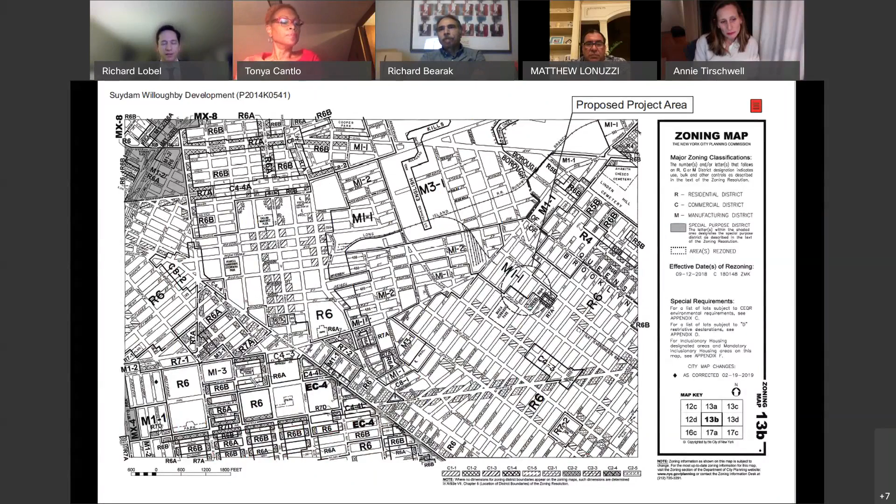So you'll notice that the project area is included within the circled area, and the subject block is currently located in an M1-1 zoning district. There's currently also an R6 zoning district to the south of the property on the southern portion of the block, which currently houses a school that will be affected by the proposed rezoning as well. Next slide.

So there are 4 basic actions sought pursuant to the subject application. The first is a text amendment application, and the reason for that is because we're creating a new special mixed-use district.

This is an MX-21 district. You can see it on the Willoughby side of the property, which pairs an M1-5 district with an R7D district. This density and height is appropriate for the area, particularly in light of the existing R6, which exists on the southern portion of this block, as well as along many blocks to the south.

In addition to the text amendment, which creates the MX-21 district, there's a zoning map amendment which accomplishes 3 things. First is to map that MX-21 district from the mid-block west through the project site to the Willoughby side. Second is to take the existing M1-1 and rezone it as M1-5, which you'll see on the Suydam side of the property to the eastern portion, where there's currently an existing 3- and 4-story manufacturing building.

In addition, there's an amendment to the southern portion of the block. You may see that the existing R6 is extended 25 feet. That's merely to correct a split lot condition, so it's more of a corrective action than anything.

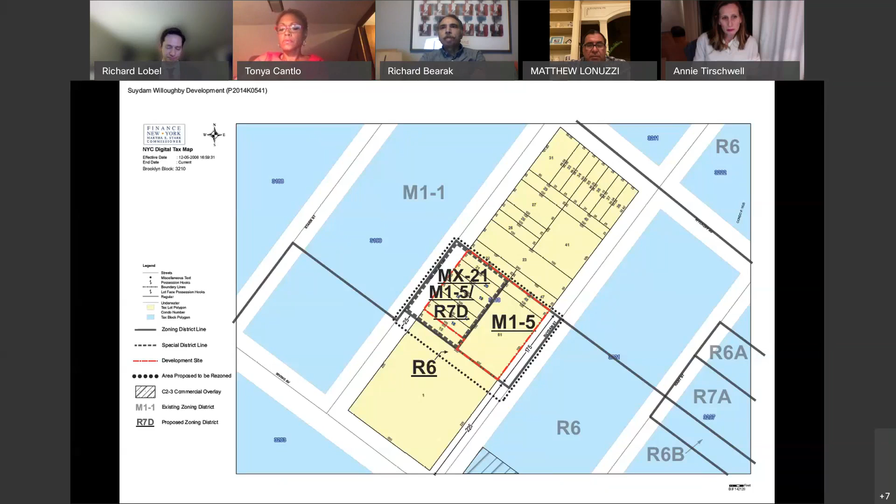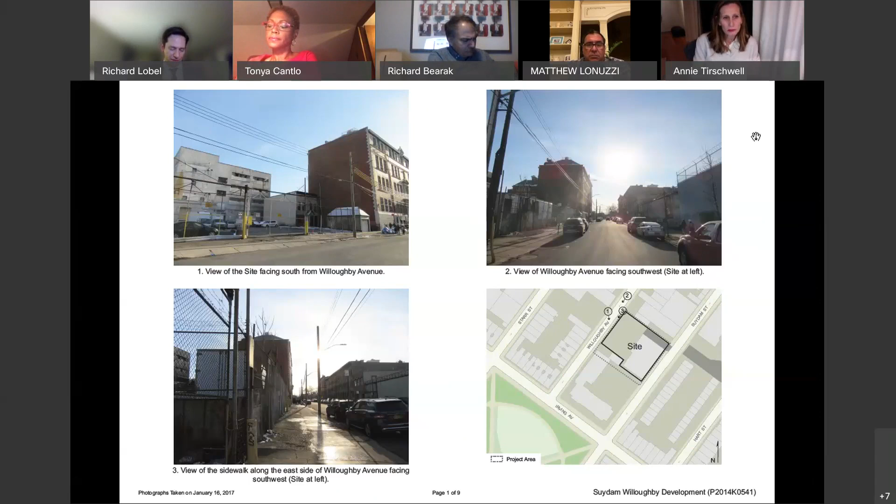It's an area which, after our discussions with the community and others, really seemed to merit this application and showed a real need for the additional development that will be created through it. David, if you want to page through the next 2 slides, there are additional photos of the buildings in the area, and then you'll come to the area map.

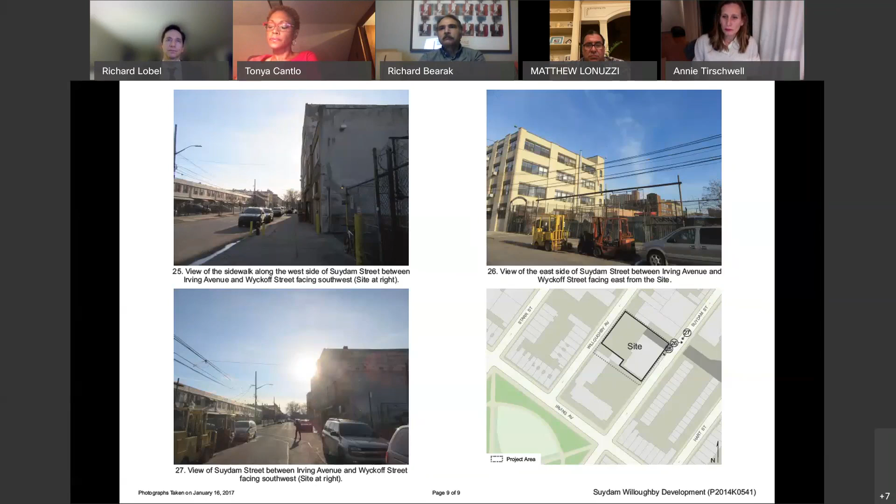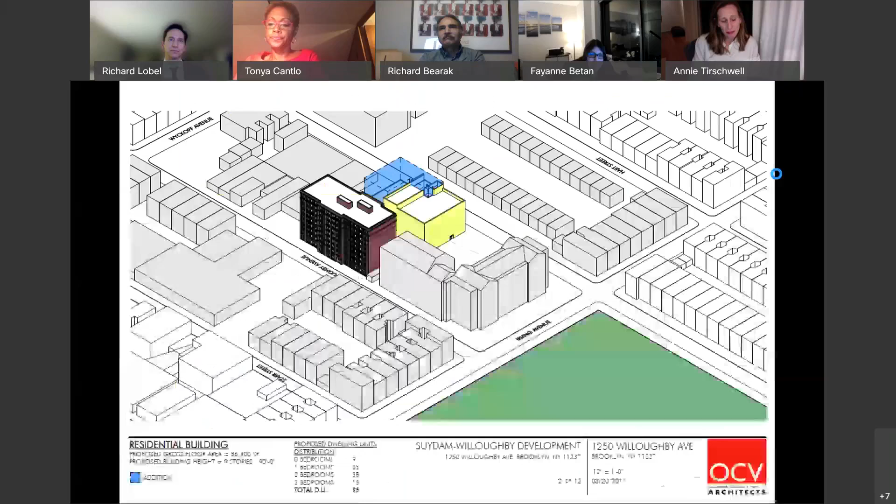One more slide. We lost David. Ah, oh, that looks like an actual photo. Did I lose the area map? No, I think it's a couple slides back. Again? No, back, back, not forward. Oh, you might have pressed it. Almost there, one more. It's almost there, it's lagging a little for me.

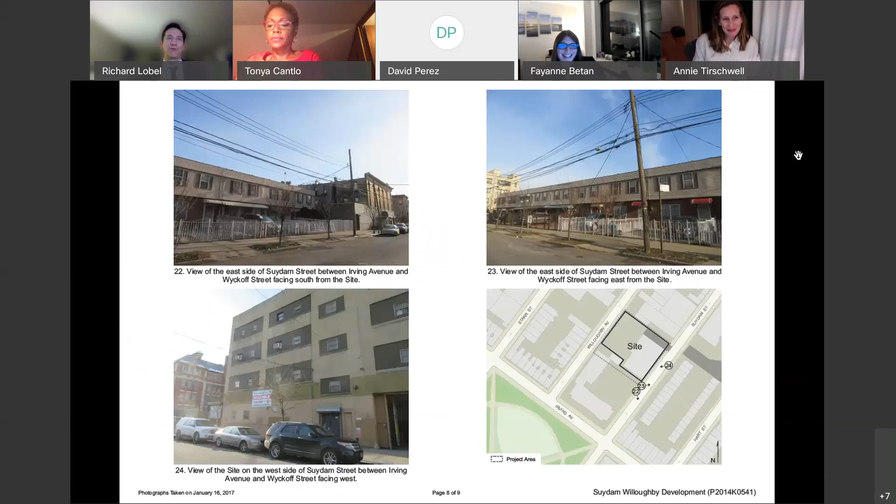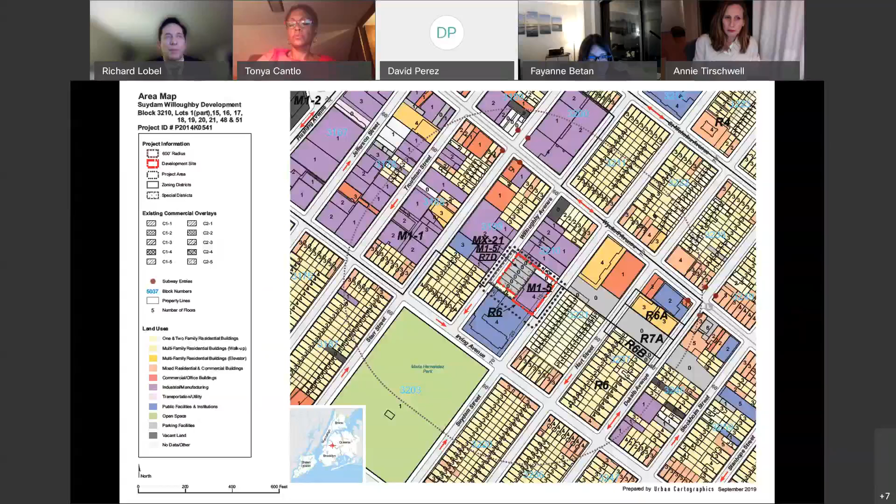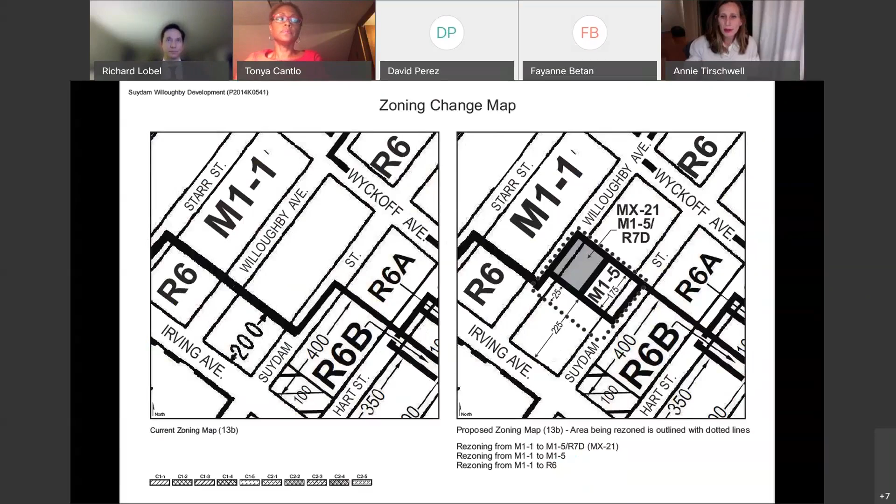So as discussed, this project is really a mix between affordable living and affordable working spaces. The manufacturing portion is an extension of an existing manufacturing building that's a little over 42,000 square feet. We intend to build a little over 14,000 square feet onto the existing structure, for a proposed building floor area of 56,580 square feet after the improvement.

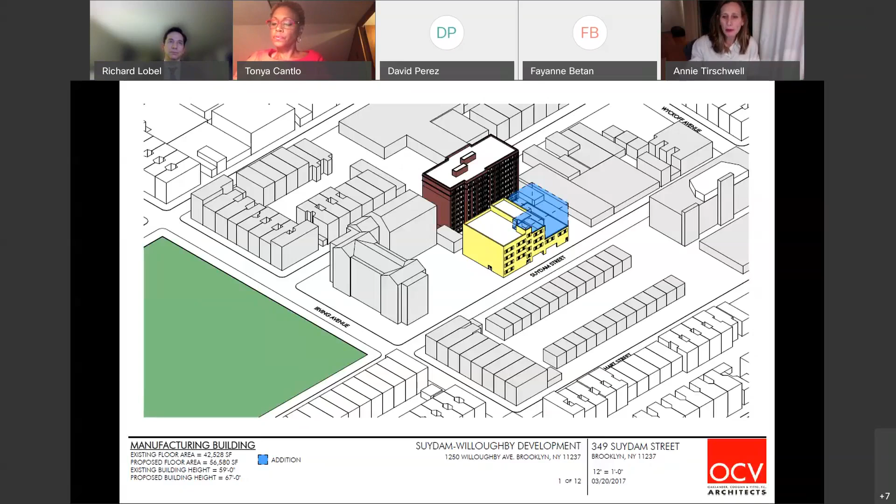As Rich was remarking, the density for the manufacturing building is really built off of the existing manufacturing building and is quite contextual. I'm going to talk a little bit about the manufacturing building in the slides coming up. Let's switch to the next slide, please.

The residential portion of the building is meant to house approximately 95 units of affordable housing. We intend for this project to fall under the mixed income program with HDC, the M squared mixed middle program. We've already been in conversations with them over the last number of years, including most recently as term sheets have begun to change. This building is approximately 95 units, with a mix of unit sizes, which I'll walk you through on an upcoming slide.

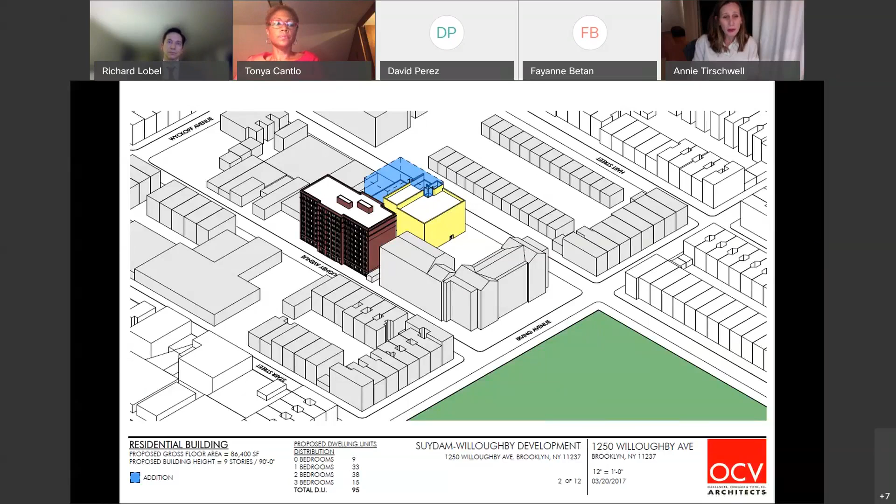So the existing building is a 43,000 square foot industrial building, currently tenanted with manufacturing tenants. We'll talk a little about that as we move forward. It's important to note the development team, Matt and Getz, have owned this building for the last 20 years, and it has solidly been tenanted by light manufacturing tenants.

In fact, part of our community engagement process included walkthroughs with the Department of City Planning, where folks were able to see firsthand the types of manufacturing tenants currently in the building, as an indication of what has been there in the past and what we intend to develop the new square footage for.

As you guys probably know, this is a very well situated building close to public transportation and adjacent to an in-place community of workers. We intend for the additional manufacturing space to be tenanted very much in keeping with the tenants we have now, so small to mid-sized production spaces. Next slide, please.

It's important to note, as city planning and the community were also interested to learn and relearn, the building has been populated by light manufacturing tenants for as long as Matt and Getz have owned it. We've decided to highlight two particular tenants: Nala Inc., a furniture design company that has been a tenant for 14 years, and Molina Carpentry, who's been a tenant for over 6 years.

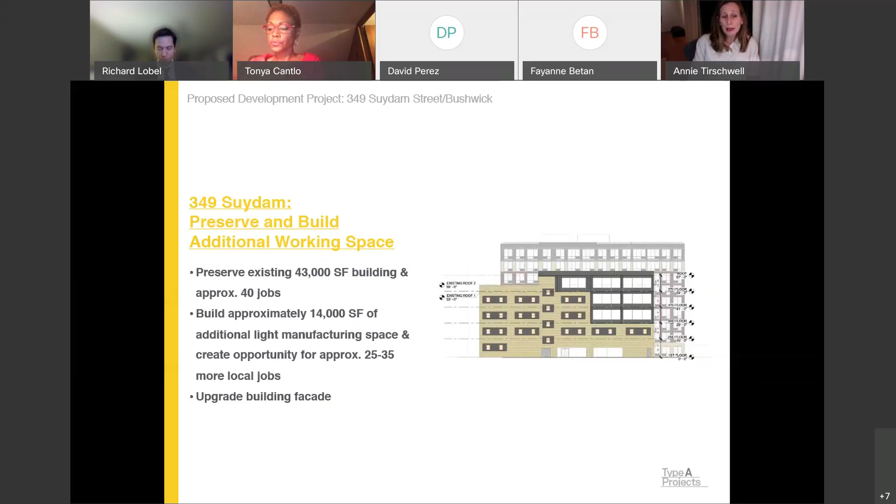So again, with this expansion, we intend to build onto the existing manufacturing building approximately 14,000 square feet. Given the density of the workforce in the building already, we think that will lead to about 25 to 35 new local jobs. As part of the addition, we will also do upgrades to the building's facade. As folks have walked through the building, certainly in Bushwick, it very much feels like a manufacturing building, and it's tenanted as such, so the upgrades we're making are in line with that manufacturing tenancy. Next slide, please.

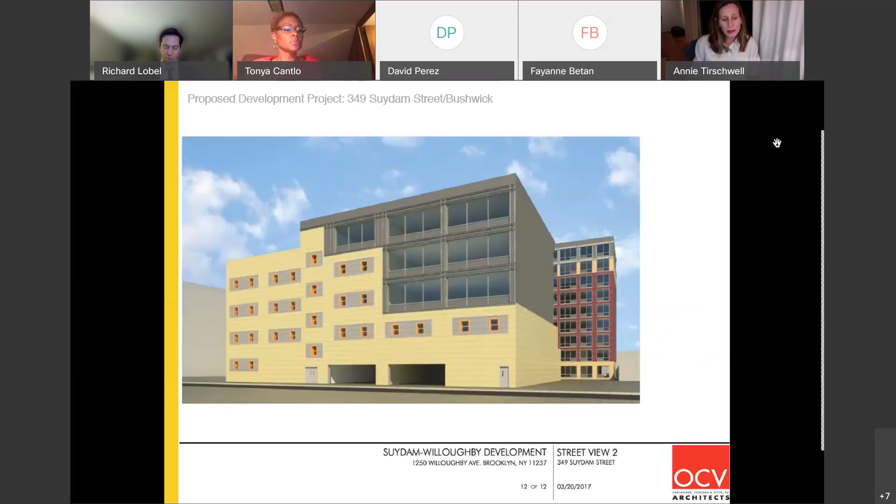That's just a quick rendering of the additional manufacturing space, woven into the fabric of the existing manufacturing building. This image is the new residential building, again a 100% affordable building to be built in line with the mixed income M squared program. Next slide, please.

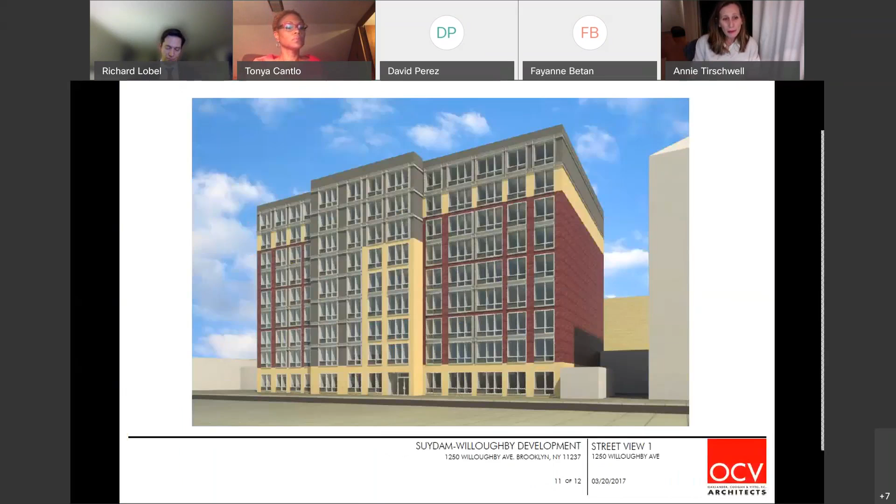We look at this project as really part and parcel of each other, that the manufacturing space and the residential space is one large development. And the way that we were able to afford to build more manufacturing space was by looking at this project as one large mixed use project. So the mixed income affordable housing underwriting is really what allowed us to build such a complicated and mixed-use project. Next slide, please.

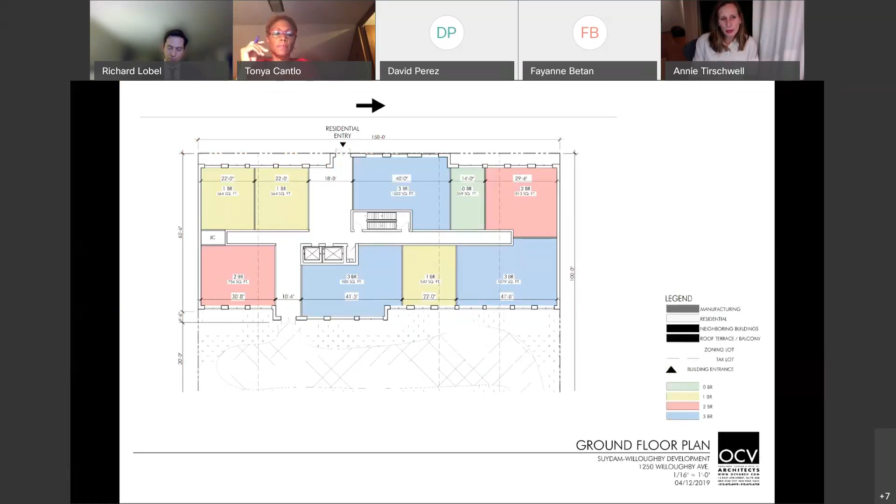Again, just another sample floor. And the next slide, another sample floor. So again, just intended to make sure that there is a robust mix of unit sizes distributed evenly throughout the building. And you'll see that there is indeed a rear yard to the project, which we intend to build for the benefit of the tenancies.

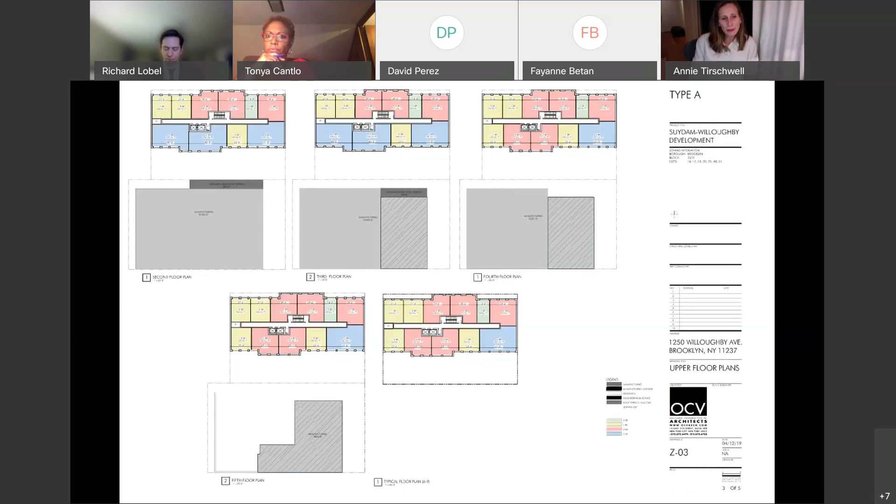And that is our presentation, but certainly happy to answer any questions.

Thank you, Richard, for your presentation. So actually, we have several questions for you. The first question deals with the conditional approval by Community Board 4 in terms of providing more units at 30 and 40% AMI and to seek HPD funding. So if you could talk about the steps that you've taken to comply with the conditional approval of CB4.

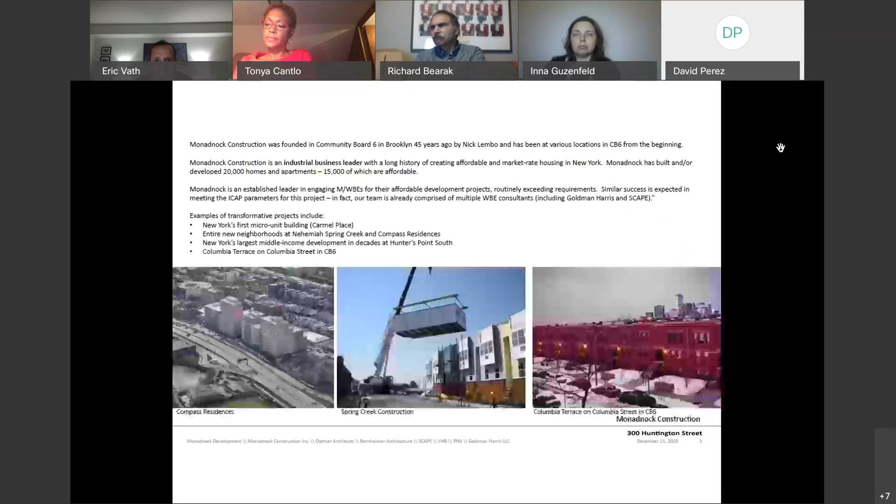Now a little background. This application is brought by the owner, Monadnock Construction. Monadnock was founded, and it has been in Brooklyn for over 45 years. I believe some of you may know Nick Lembo, who's been a fixture in this neighborhood, including CB6. Monadnock Construction is your classic maker—a construction company that builds buildings, and they've been doing so successfully for decades. They're proud to say they've developed over 15,000 units of affordable housing, and this construction has continued through the COVID-19 pandemic.

Some examples of projects you may have heard of: Carmel Place, New York City's first micro-unit building. They've built entire new neighborhoods, done Nehemiah Spring Creek and Compass Residences, middle income development at Hunters Point South, also Columbia Terrace on Columbia Street in CB6. So you see Monadnock is an important and vital piece of Brooklyn's heritage here. Next slide, please.

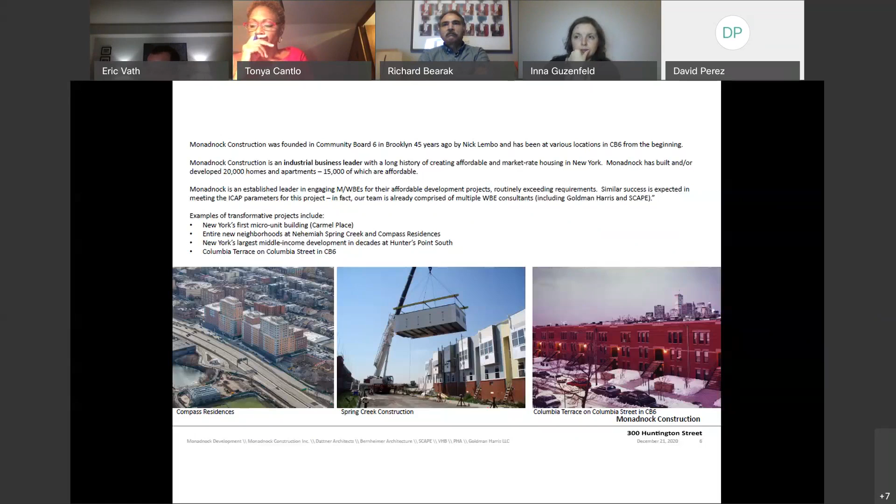Monadnock has a couple of needs. They have a current headquarters on 3rd Street that they're looking to keep within the neighborhood. They employ about 250 people out of their 3rd Street location—80 people are at the headquarters itself, but they employ 250 out of those offices. What they want to do is expand, so they've identified a site along the Gowanus for a proposed 6-story, 100,000 square foot building.

They're going to occupy a portion of the new building as headquarters—not only will it have their shop and a yard, but also their offices. There will be space in the building for light manufacturing uses and a cross-section of other uses. As we'll see in the renderings, they'll have ground floor retail, including restaurant spaces, that really activate the Gowanus Canal and make it a vital and exciting new waterfront. This is in keeping with the Gowanus rezoning, which we'll discuss shortly. Next slide, please.

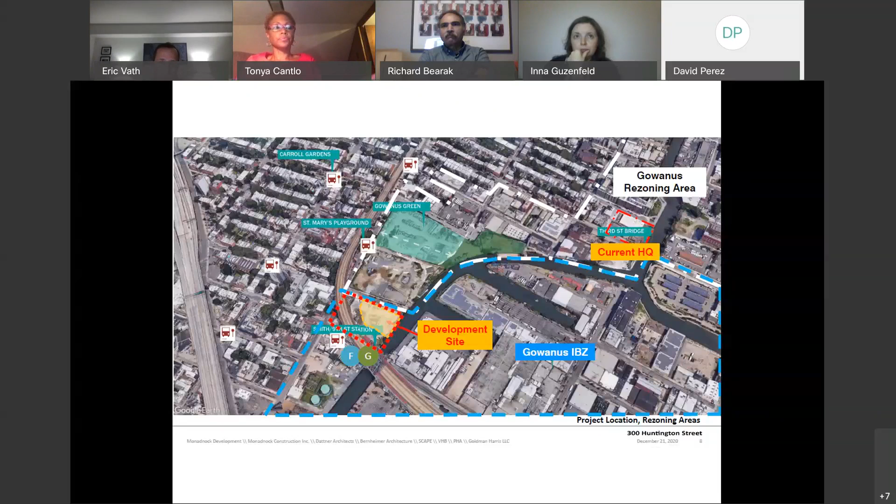So here's a good overview. You can see at the upper right, Monadnock's existing headquarters, so they're not moving too far. But I want to draw your attention to a couple of things. There's the white dash dotted line, which represents the Gowanus rezoning area. This site is immediately adjacent to and outside of the Gowanus rezoning area, and it's in an IBZ, whereas the rest of the Gowanus rezoning is not. The blue dash line indicates the IBZ. And you can also see the development site shown in yellow, which is a portion of the rezoned area, shown in a dotted red line.

So this area is what we like to consider transit rich. In addition to being located directly beneath a subway line, the GF line, there are also plenty of bus lines in the vicinity, as well as bike routes and pedestrian opportunities. Once the Gowanus plan comes into effect, the entire waterfront will be activated for pedestrian use. And this Monadnock site, though not part of the Gowanus plan, will serve as the gateway to this vital and exciting esplanade as it runs through a newly cleaned up and dredged Gowanus Canal.

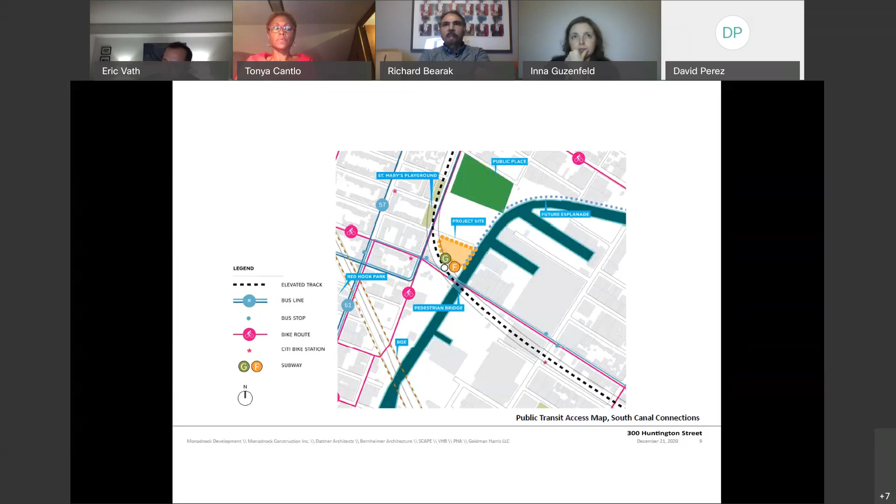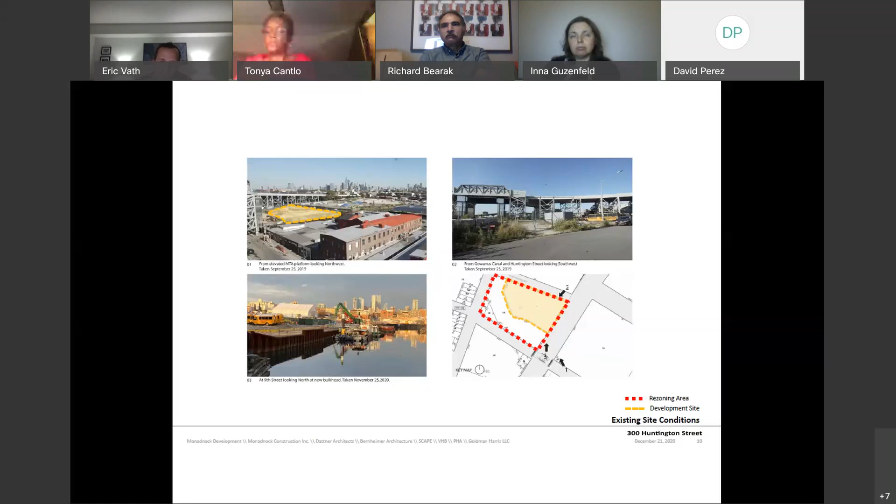So here are some site photos for context. On the upper left-hand corner, you can see in yellow, that's the site. It's actually currently used for bus storage - you can see some of the buses in some of those photos. On the bottom lower left-hand corner, you'll see they just replaced the bulkhead. It's a sheet pile bulkhead that's newly refurbished, and work continues on the bulkhead at the end of Huntington Street. Monadnock Construction has proactively replaced the bulkhead along their site. Again, the dashed red line is the rezoning area, and the yellow is the development site where the 100,000 square foot building headquarters is proposed.

So let's talk about the zoning. The zoning is currently an M2-1 medium manufacturing/industrial district. It has an FAR of 2, maximum building height is 110 feet. The parking is based on a rather onerous requirement of square footage for the use or the number of employees, whichever is lesser. Due to these parking requirements, it pretty much makes the development site impossible to develop, because in an as-of-right scenario with 100,000 square feet of floor area, there would be approximately 242 spaces required for a project of this size. No below-grade parking is feasible here because of the high water table. Above-ground parking, of course, would in the exterior take up the construction yard, which is vital to Monadnock's business. And if it's put inside the building, it would raise the building too high along the Gowanus Canal and put it up against the height restriction.

So the proposed zoning - we propose to make a very moderate change from an M2-1 to an M2-3. An M2-3 district actually has all the same bulk controls. The only effect it's going to have here is to eliminate parking requirements. The FAR of the existing M2-1 zoning is 2, maximum height 110 feet, and there's the onerous parking requirement. The proposed M2-3 has an FAR of 2, the same FAR, same height restriction, and no parking requirements. Historically these M2-3 districts were zoned along waterfronts, traditionally in Manhattan, so it's actually a very suitable zoning district for not only this area, but also for an IBZ.

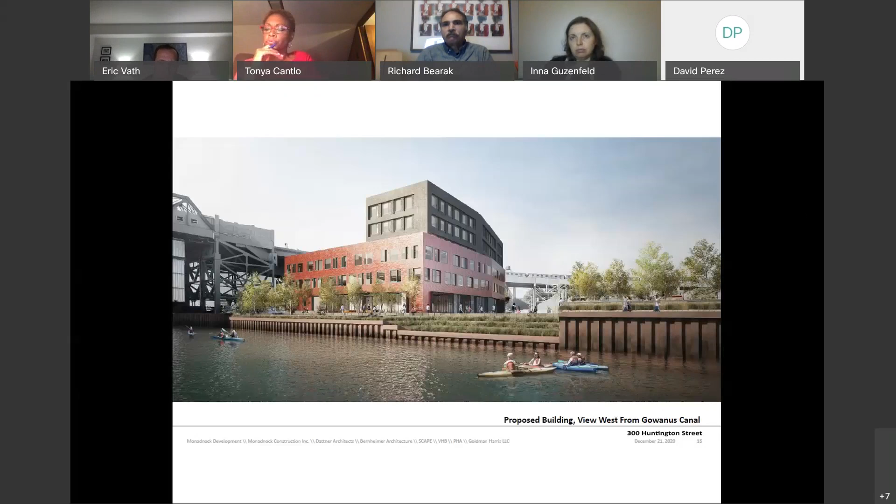So here's again the rendering showing the proposed building, and you'll see that this does show the sheet pile bulkhead newly installed.

Now I'd like to introduce, if he's available to speak, the architect Bill Stein. He's with Datner Architects, and he can take you through his design of the building. Bill, are you there? I am. Thank you, Eric. My name is Bill Stein. I'm an architect with Datner Architects. We are the architects for the building in association with Bernheimer Architecture.

As you can see from the previous slide rendering, the building will be predominantly a brick building with the lower 3 floors an attractive red brick, and the upper setback 3 floors a dark gray brick. Sort of intersecting volumes in an L-shaped configuration that fronts both on Huntington Street and on the public access esplanade, and frames the contractor's yard so that it's not visible from Huntington Street and from the public.

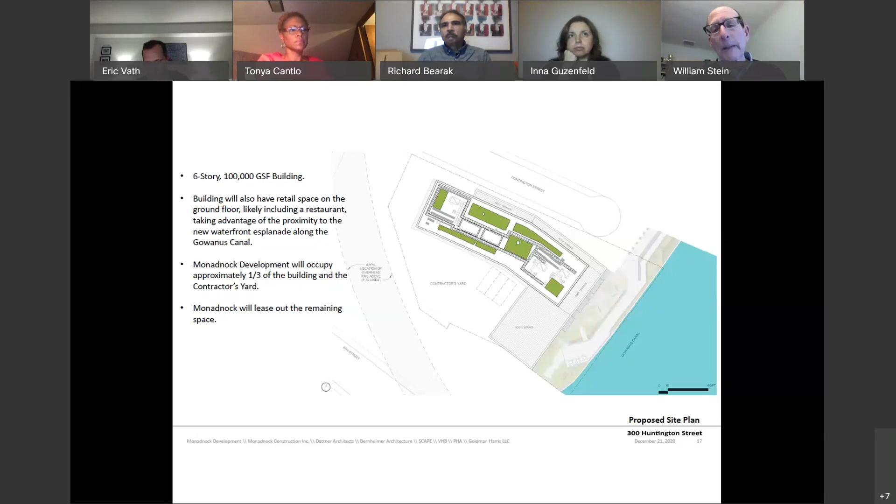Some of the sustainability features of this building will include high performance mechanical systems, high performance energy efficient LED lighting, and a highly insulated building envelope with high performance windows.

Stormwater control and green roof elements on the roof of the building, which you see in this diagram. We understand a question has come up about the possibility of rooftop agriculture. We have a significant amount of mechanical equipment on the roof and anticipate more to serve tenant needs, and having the rooftop on the 6th floor become an occupied floor would trigger high-rise construction requirements of the building code, such as extending elevators to the roof, providing an emergency generator, an auxiliary radio communication system, and other features which would be disproportionately expensive for the construction of this project.

The building will have retail space on the ground floor, likely including a restaurant at the corner of Huntington where it meets the esplanade, overlooking the canal.

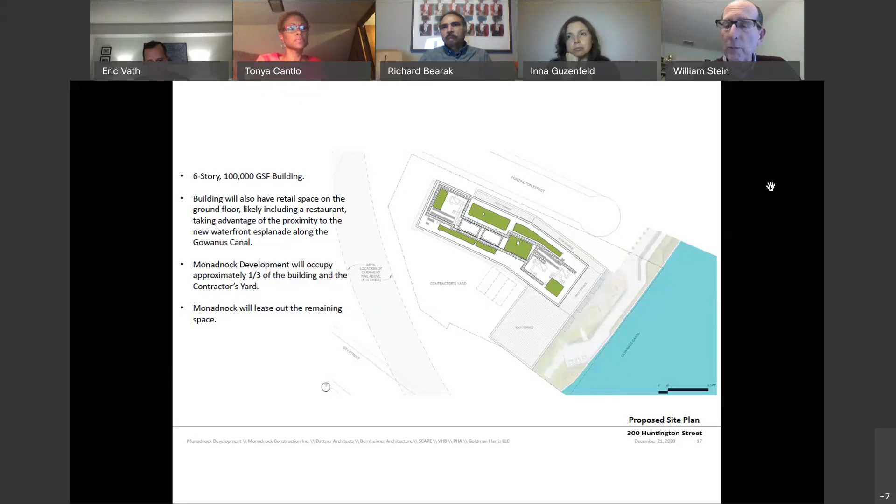Monadnock will occupy approximately a third of the building, as well as the contractor's yard, with the remainder of the building being leased out. If we go to the next slide, I'm going to turn the presentation over to Gena Wirth from Scape Landscape Design.

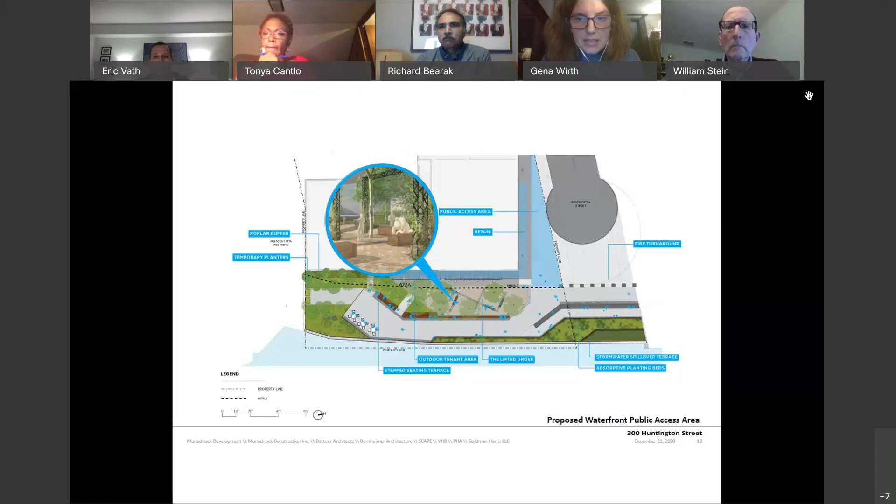At the street end, we designed a series of seating and gathering areas that encourage neighborhood residents and visitors to sit and linger along the edges of the canal, stepping down towards the canal to enhance visual access to the water, and creating large, generous planting beds that capture and treat stormwater, some of which can be seen in the next slide. The intent of this space is to create a unique stormwater planted area that reflects and highlights sites and vegetation types of the historic ecological fabric of the Gowanus, helping manage stormwater within the site itself. We also have a pedestrian surface in this zone, a metal grate, so people can see through and see that process of stormwater moving within the system here.

In general, this site is a very unique piece along the canal. It's directly adjacent to the waterfront retail and restaurant space that Bill mentioned, and will really create an active and thriving destination along the canal. Next slide.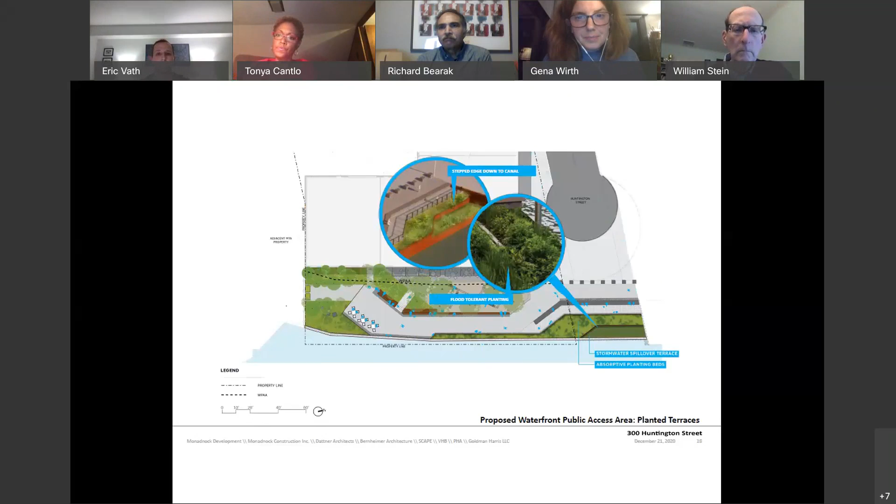When we zoom out and look at the greater site and think about both the stormwater and resilience parameters of the site design, Bill already mentioned the series of green roofs that line the rooftop, which help absorb stormwater. Stormwater running off the contractor's yard is collected in a fully separate system that has a new permitted outfall to the Gowanus Canal, handling any overload coming from the existing planting areas or paved areas of the contractor's yard. So this project is not contributing any stormwater to the combined sewer system, which is of great benefit for the water quality of the canal itself.

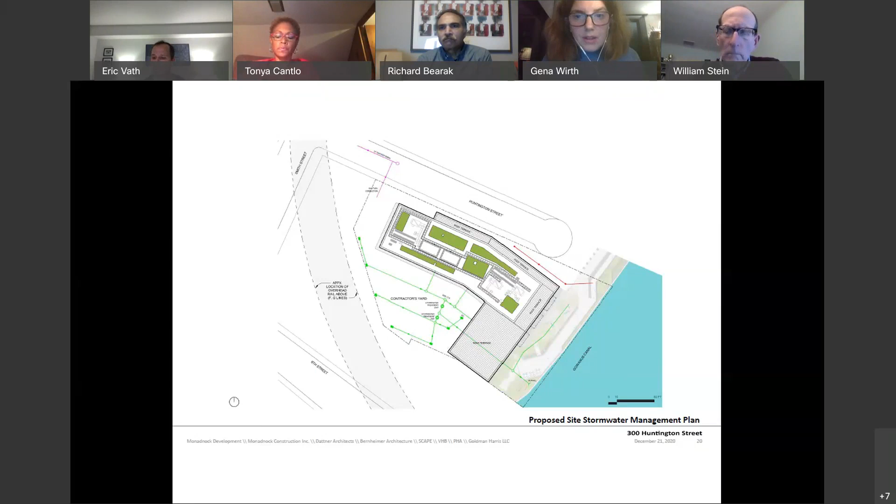This planting bed along the perimeter of the site also captures some of the industrial and ephemeral qualities of the canal today, with planting spilling over the edges of the bulkhead. So we're trying to preserve that in the design. Next slide.

I'll speak briefly on a couple of requested authorizations for the waterfront public access area that enable these creative design solutions and slight modifications to the waterfront zoning framework. In order to keep the site design resilient, but also step down to the water's edge, we needed to slightly modify the maximum grade change permitted, in order to reduce flooding on the site and enable this resilient site design. That is one of our first requests.

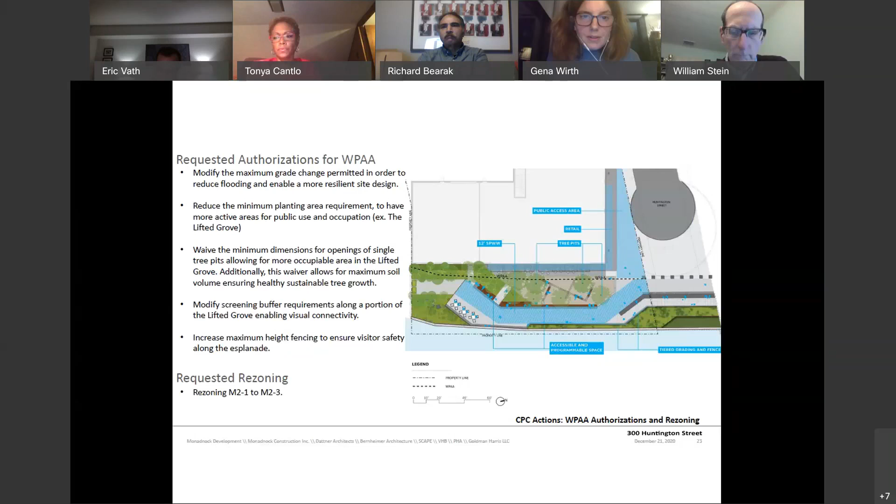Finally, we have requested to increase the maximum height fencing to ensure visitor safety along the Esplanade and to the train bridge to the south.

I think I'll pass it back to Eric to speak on the last request. Great, thanks so much, Gena and Bill. If you could go ahead, one more slide.

Oh, that must be our conclusion. Well, let me summarize. As stated before, there are three actions in front of you. One is a rezoning from M2-1 to M2-3 manufacturing district.

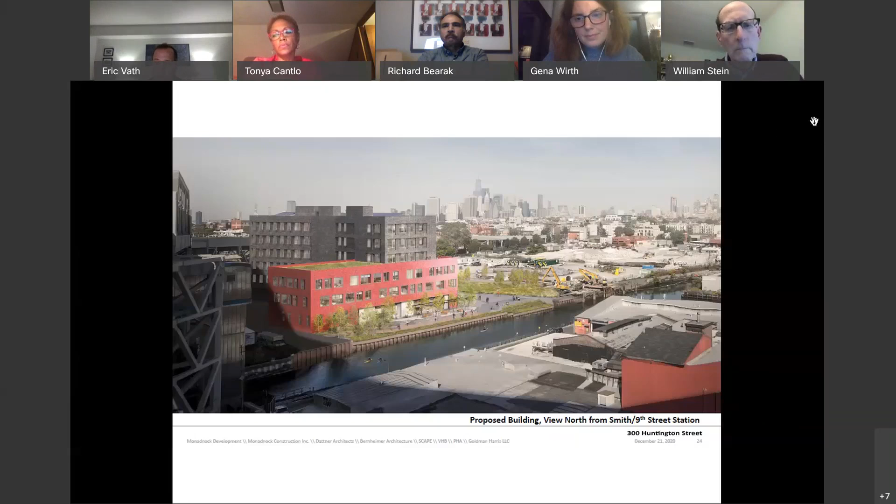There's a certification for a waterfront public access area, and with it, as Gena described, there are five authorizations to deviate from the controls of the zoning resolution with respect to those waterfront public access areas.

We also want to emphasize that many of these changes we're seeking are consistent and indeed encouraged in the waterfront access plan for the Gowanus waterfront, which Gena and SCAPE are well involved in. So it was a blessing to have her on this job as well.

In conclusion, before we get to the question and answer session, I want to clarify some of the employment data. There will be approximately 1,045 jobs produced directly, indirectly, and induced from this relocation of the headquarters, including, over the 2-year construction period, 330 construction-related jobs.

It's important to note that there are jobs related to the brownfield cleanup program and other conservation efforts to improve the Gowanus Canal and make it a vital and cherished resource for the community. In the end, Monadnock expects about 715 permanent jobs to be created indirectly that are transit accessible and within the IBZ, which we know is a very important goal to maintain those jobs in the IBZ.

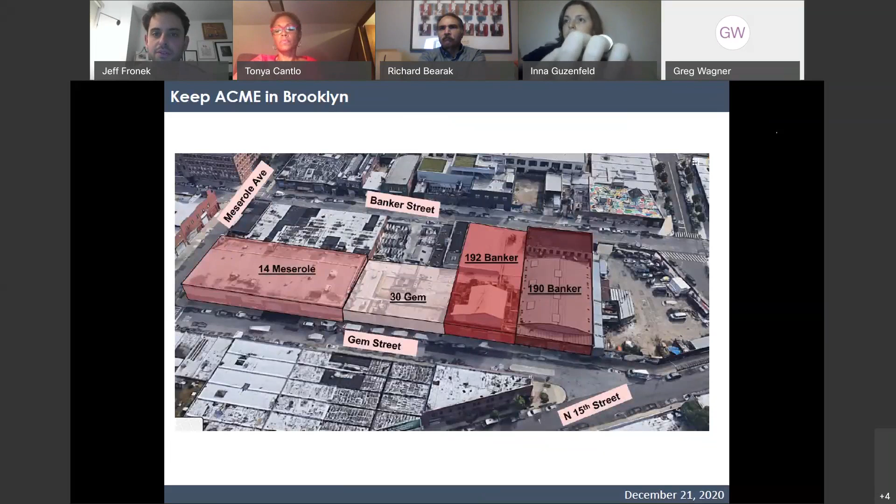Once their relocation is complete, demolition of the current facility will commence, and then construction of the remaining component will begin. The design of the new commercial space will minimize impact in a few key ways. First, it will incorporate materials compatible with the existing character of the neighborhood.

Second, it will create a pleasant pedestrian experience that includes about half an acre of open space and retail shops intended as amenities to both the neighborhood residents and building tenants. And third, it will complete the building with a glass box that's significantly set back from the brick facade of the base.

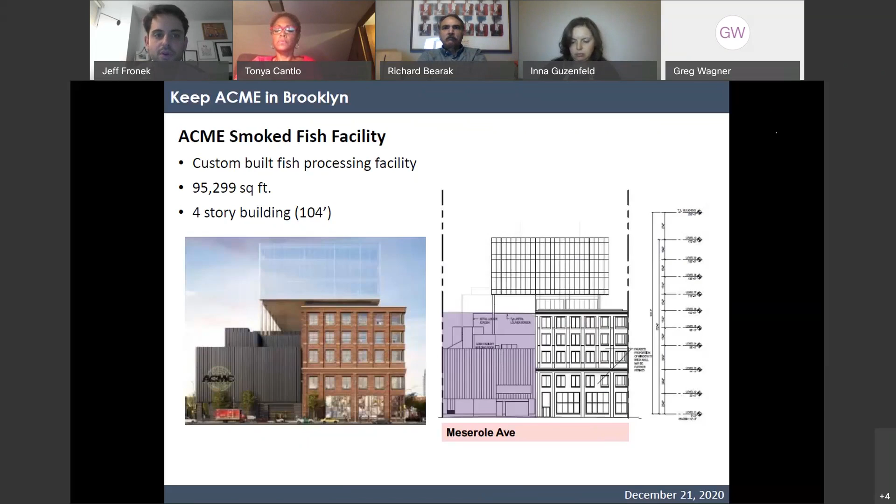The reality is that the commercial component of this plan offers a revenue stream that is absolutely needed to subsidize Acme's new home. The cost of building this new facility is some $40 million, approximately more than ever will be recovered, making a standalone factory economically unachievable.

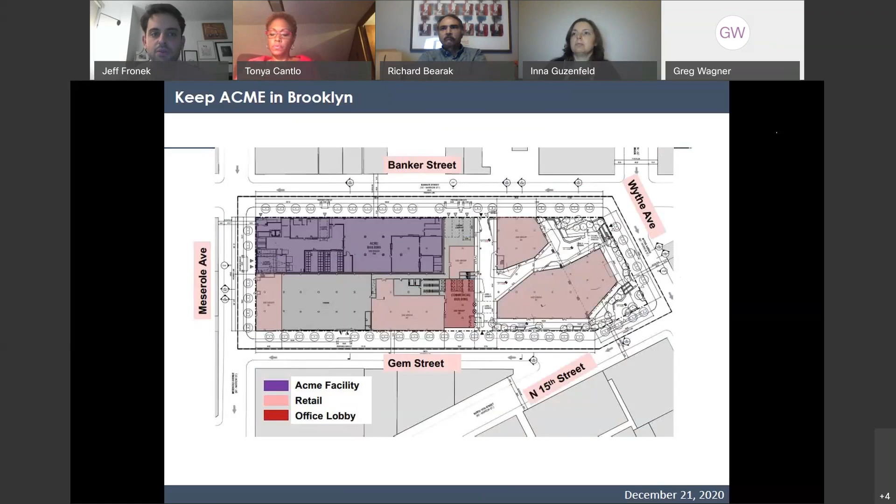By allowing this proposal to move forward, more than 100 union jobs, many held by Brooklyn residents, will be saved, and a place for more than 2,000 jobs will be created. Some $550 million in private investment will offer an economic boost that is needed now more than ever.

And to be sure that the people closest to the development will benefit, we are partnering with St. Nick's Alliance to provide job training services to neighborhood residents for both the construction of the building and as a service to those companies who lease space in the building and want to tap into the local workforce.

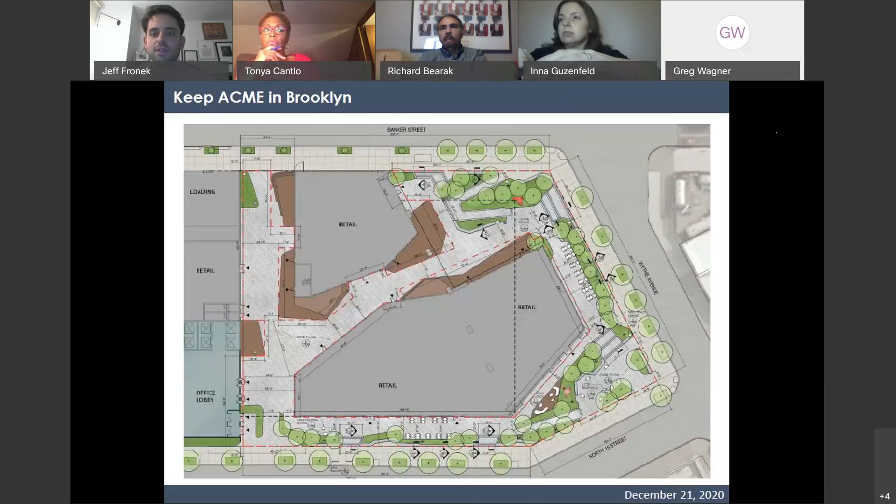We are also working with Friends of Bushwick Inlet Park and North Brooklyn Parks Alliance to support their efforts, even as we provide about half an acre of open space that will link McCarren Park to the east with the new Waterfront Park to the west once it's built.

And now Adam will offer additional details from his perspective on this project.

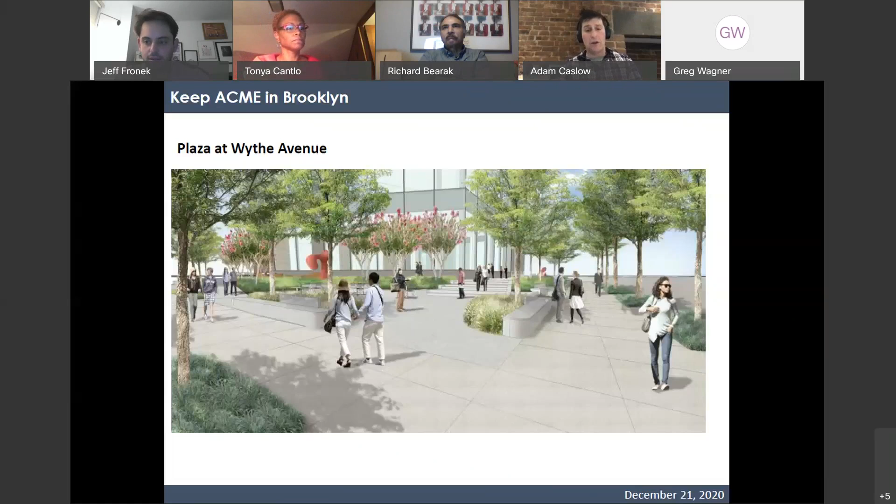Advances in food safety increase costs and make our configuration a little bit inefficient, and stretch the capabilities of an aging facility. The level of investment required to upgrade this existing facility is cost prohibitive, so we've kind of put patches on our existing site with hope that it'll last a little while longer.

Out-of-state locations offer other efficient solutions, but our family wants to stay in Brooklyn. It's a big part of who we are, not just of our brand, but of our corporate identity. The biggest hurdle we've encountered is trying to meaningfully upgrade our facility without disrupting our existing operation.

That's impossible. Trying to juggle food safety regulations in a construction zone is not going to happen. So a mutual friend introduced me to Jeff, and over the past several years we've been working with his team to devise an economically feasible and operationally viable plan for a new Acme home.

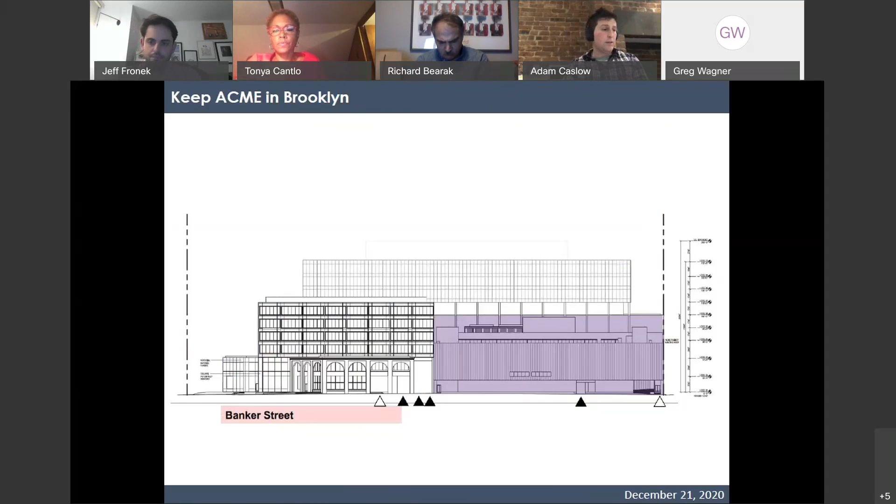So just to take you on a quick tour of the proposed layout across 4 floors. On ground level, known as the first floor, we'll be able to receive raw material, fish, ingredients, and supplies from the street, and have fish go through our smoking process, which includes storage, thawing, then brining, which is the process of adding salt to fish.

The last thing I wanted to note was at the community board hearing 2 weeks ago, we heard an outpouring of support from many people in the community who spoke in favor of our plan, and others who expressed some concern about the proposal and our current operation.

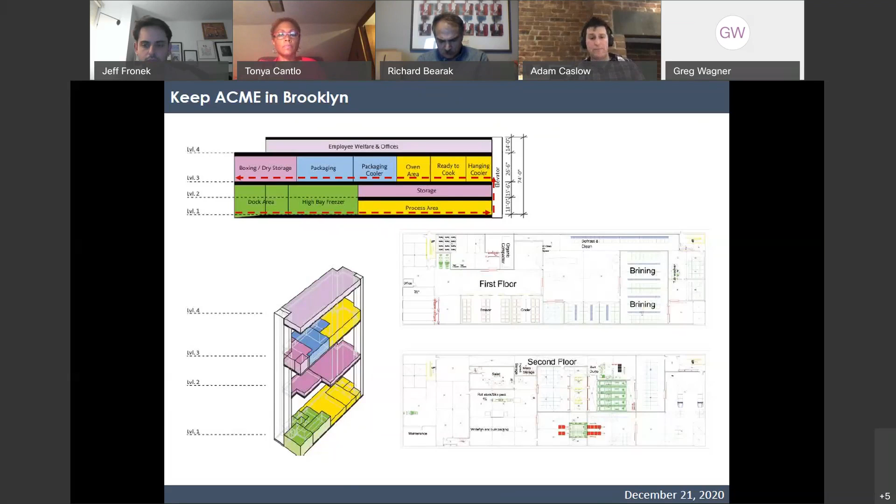As Jeff mentioned, the mixed use zoning that allows new commercial development to subsidize manufacturing uses was conceived here in Brooklyn and first used for development at 25 Kent Avenue, just a few blocks from this very site. The project is based on that same concept.

The new commercial space offsets the cost of creating manufacturing space. In this case, that requires a change in the underlying zoning district and the imposition of restrictions by a special permit that will lock in the proposed plan. Specifically, we're seeking...

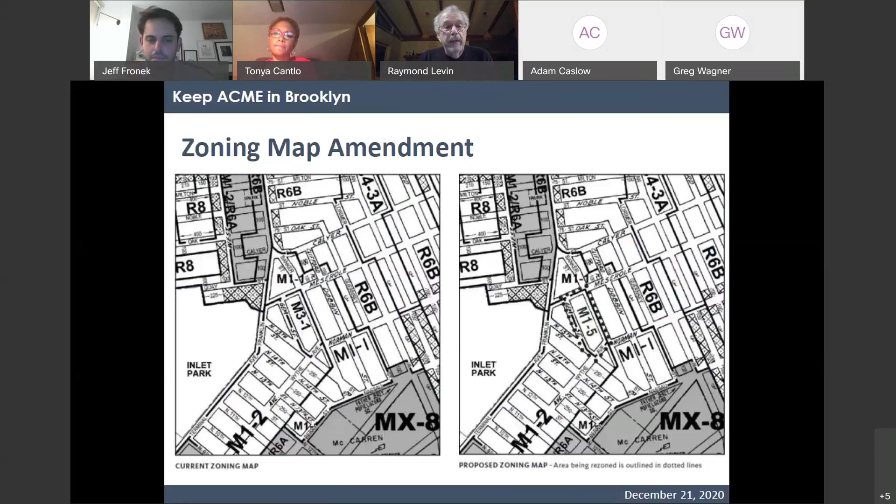We are seeking a zoning map amendment to change the existing M3-1 district, which is a 2 FAR, to an M1-5 district, which is a 5 FAR, and a large-scale general development special permit to allow certain limited height and setback waivers. Those waivers would allow the street wall on portions of Meserole Avenue and Gem Street to rise to 104 feet rather than the standard 85 feet. And at that point, a setback is required, which we will be providing.

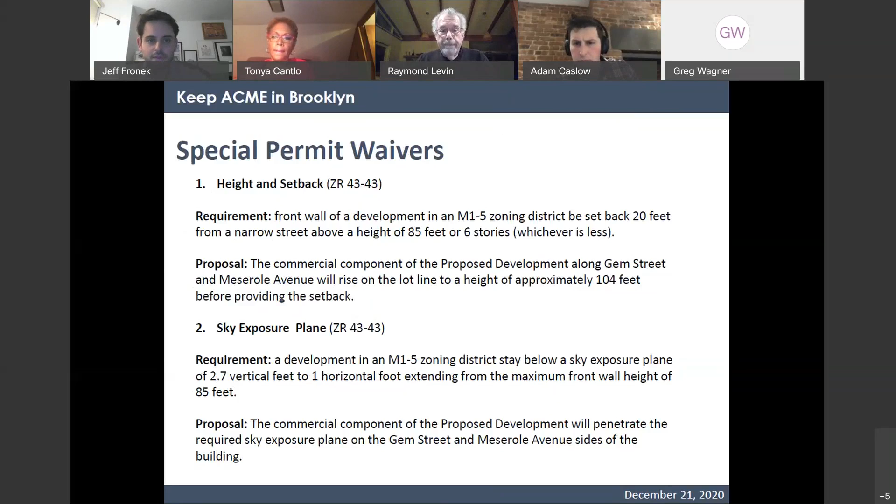Thank you, Ray. As Adam mentioned, 2 weeks ago, Community Board recommended approval of this plan. There was an overwhelming 2-to-1 margin of that vote, and they also sought to make the plan better with some specific recommendations. These recommendations really fell into a few categories. One was assurances that Acme space will remain manufacturing.

2, there were several environmentally friendly best practices that the Community Board recommended. 3 was to maintain compliance with all relevant local laws. And 4 was to minimize the impact both of the construction and then the operation of the new factory, as well as the commercial spaces.

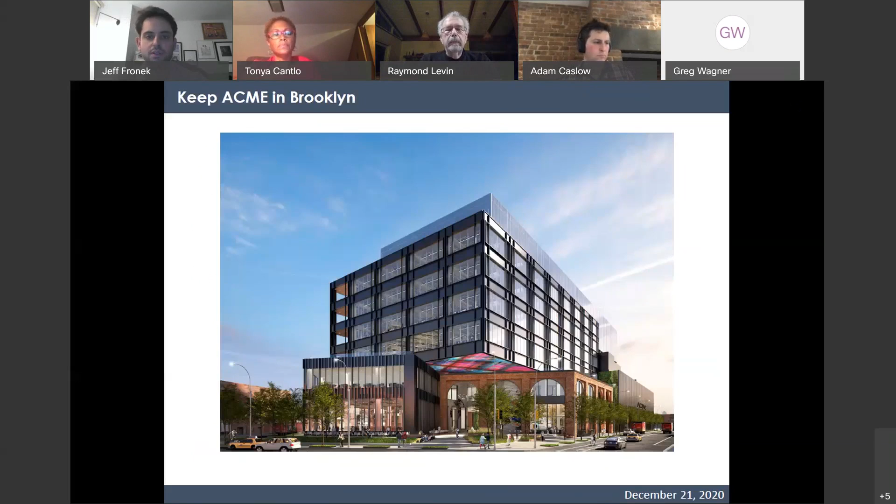As we took those recommendations, and based on that, we have a few responses.

We agreed to the condition offered by the Community Board that we seek to enter the Industrial Development Agency, or IDA program, which would require the Acme space to be maintained as industrial for a minimum of 25 years.

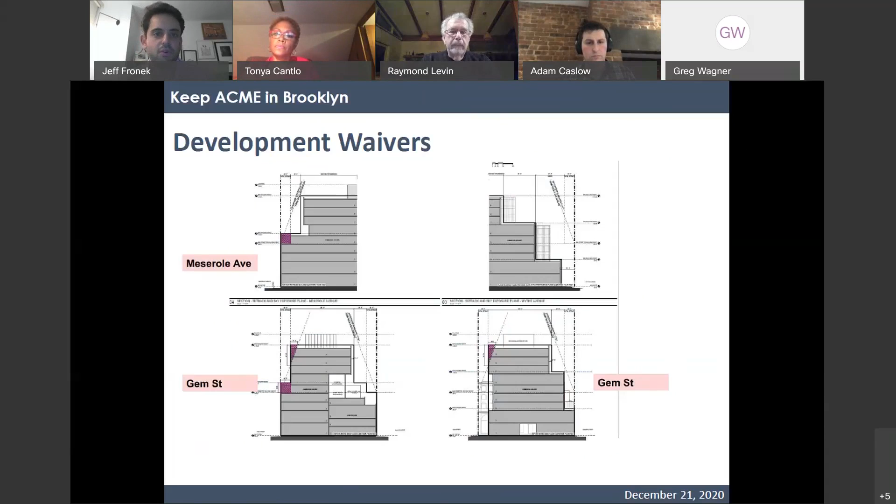Furthering our acceptance of the board's recommendations, the new development will be fully compliant with any and all local laws, including Local Law 97 of New York City's Climate Mobilization Act, enforcing strict carbon emission targets, coastal flood resiliency and erosion regulations to protect against rising sea levels, as well as Local Law 15 of 2020, which requires bird-friendly materials on at least 90% of the first 75 feet of the building's exterior to reduce collision hazards. We will also achieve at a minimum LEED Silver certification by incorporating many, if not all, of the committee's recommendations.

Next slide, please. To ensure the project's benefits stay close to home, which was another of CB1's recommendations, we are in the process of finalizing an agreement with St. Nick's Alliance, which would serve as our partner in providing skills training and job placement services for at least 25 construction laborers, and we'll work with them to devise additional job training and placement programs for potential tenants of the commercial spaces. This will ensure that local residents are fully able to enjoy the economic benefits derived from the development.

Finally, we agree fully to the committee's request that Rubenstein meet its obligations to keep the community informed as the development proceeds, and we will work with you and others to develop the appropriate mechanisms and specific scope for a community liaison. Thank you very much.

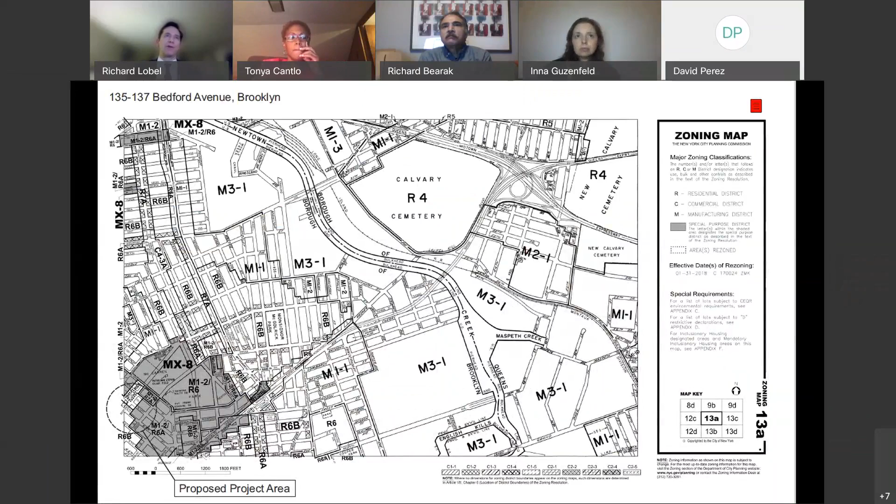This application merely seeks to map a C14 overlay. The circled area where the property is located is currently in R6A and R6B districts along Bedford Avenue. In this area along North 5th to North 11th Street on the western portion of Bedford, and between North 5th and North 8th on the eastern portion, there already exist C14 overlays. Within the surrounding 10 blocks between North 5th and North 11th, roughly 80% currently have commercial overlays, contributing to Bedford Avenue being a commercial thoroughfare populated by businesses, restaurants, stores, etc.

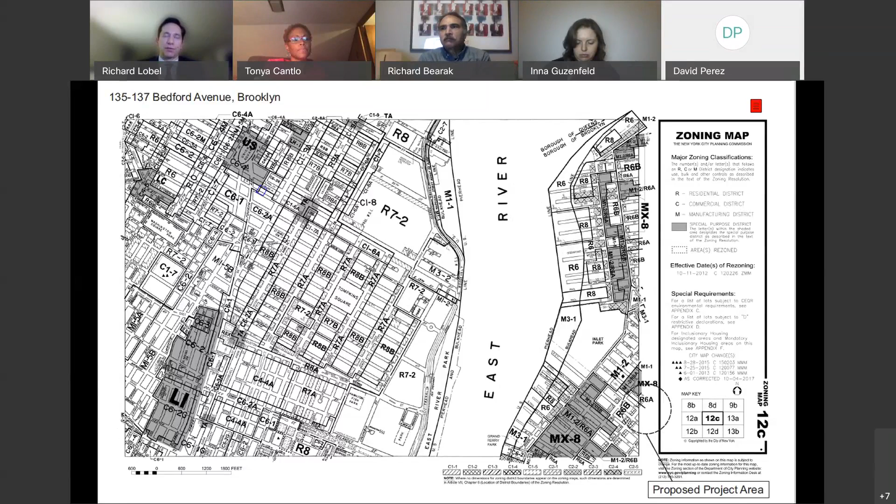Also to note, on our property, specifically the block we're located on, there's already an existing MX8 M1-2 R6A, which in some form has existed since 1973. The block itself is heavily populated by commercial uses. The properties immediately to the east, adjacent to these 10 lots fronting on Bedford, can already be populated not merely by retail uses, but by M uses.

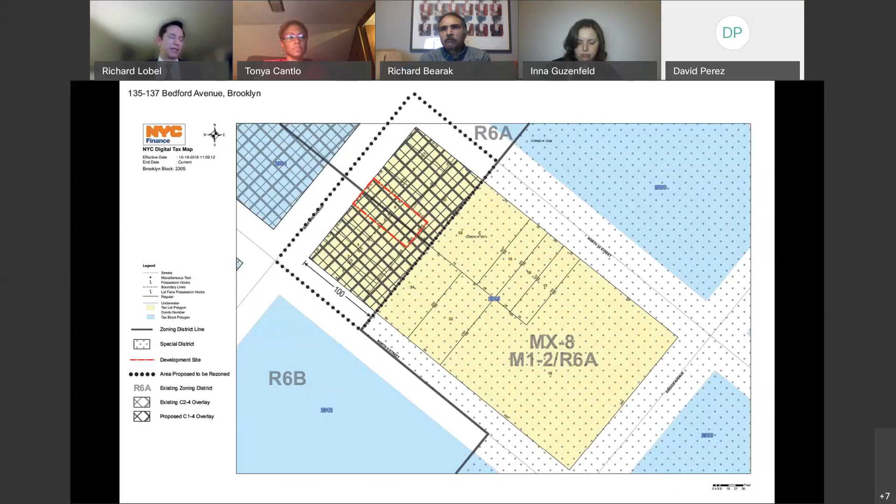Immediately across the street and to the southwest are commercial overlays. So really this amounts to almost a general flavor of commercial uses along Bedford, and importantly puts these properties at somewhat of a disadvantage by forcing them to adhere to merely residential zoning requirements. Next slide.

Opposing that, in the current position it's a rather onerous process for an existing grandfathered use to make any changes. So again, you notice not merely the C14 overlay, but also the M1-2 R7A, which exists along Bedford two blocks to the north of us. Many of these blocks are inhabited by commercial uses and commercial overlays.

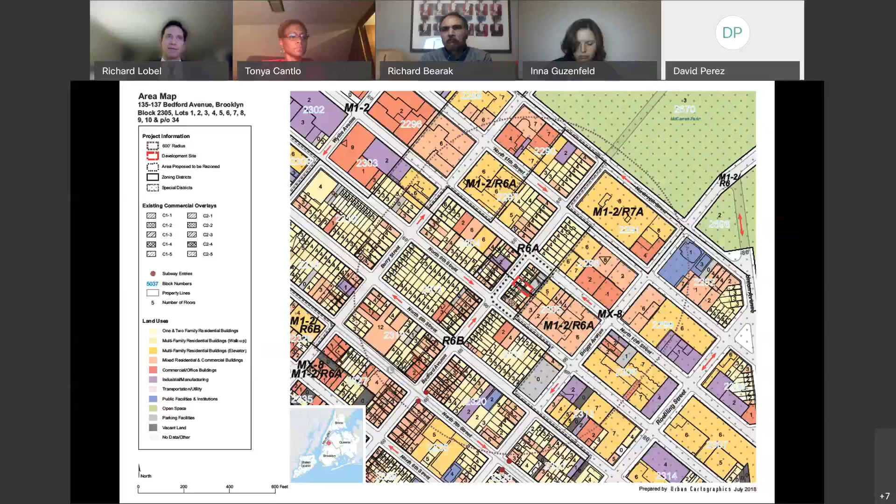Additionally, on the block to the northwest of us there is 116 Bedford, which was itself the subject of the 116 Bedford rezoning application, brought by our office and approved in January 2018. That similarly marked the frontage along North 10th and North 11th to the west on Bedford with a commercial overlay. Next slide.

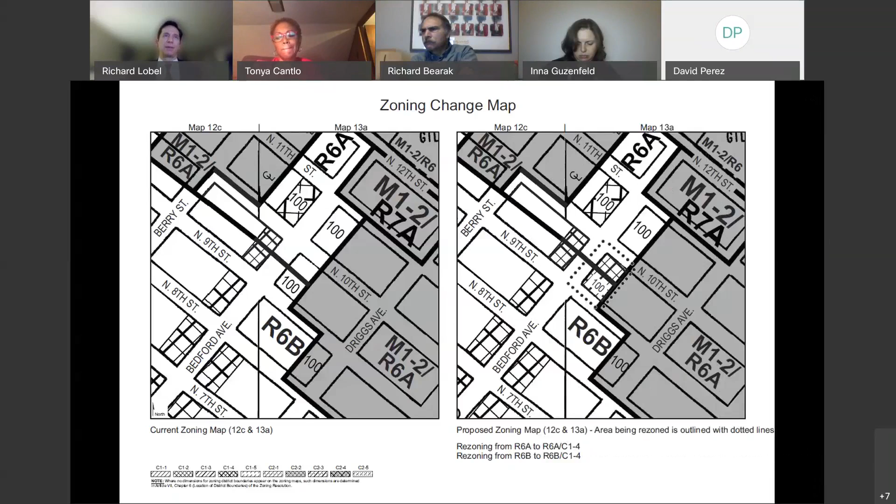You merely are now able to populate that ground floor with commercial uses. I think that may be the end of the presentation.

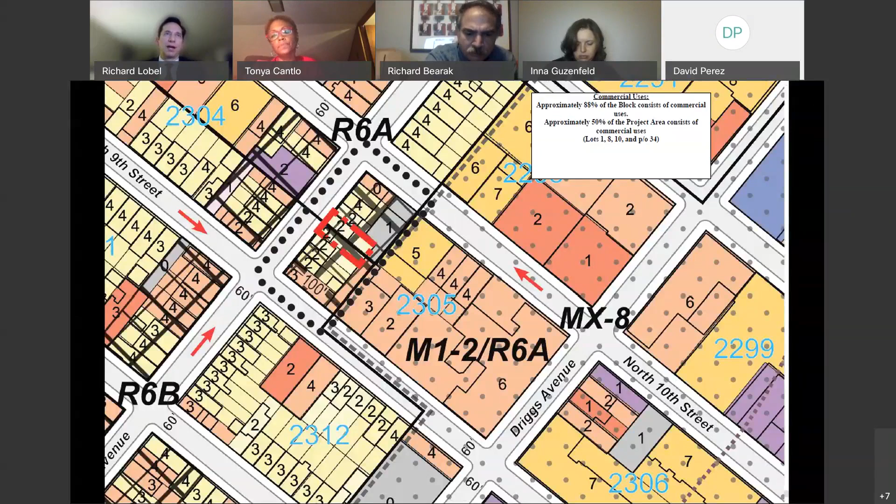Oh, this one last slide is merely to illustrate that we took a look at the commercial uses on our block. On this block itself, even prior to any rezoning, roughly 88% of the block consists of commercial uses, and approximately 50% of the project area consists of commercial uses. So this is one of those rezonings where, looking at a conformance analysis before and after the proposed rezoning, within the rezoning area you go from close to 50% nonconformance to 100% conformance, which we view as a hallmark of a good rezoning.

Next slide. That is the end of the presentation, and we're happy to answer any questions.

That was a false alarm.